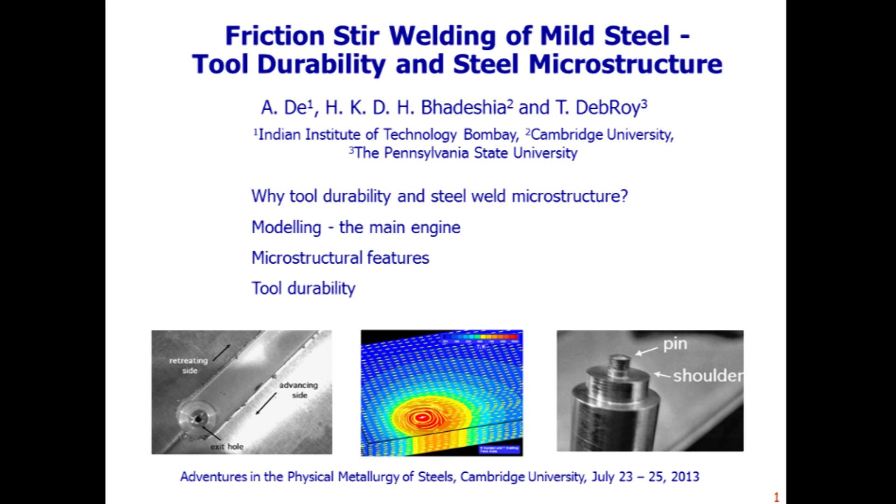Friction stir welding is not commercially used for steels. It's a very nice process for joining soft alloys like aluminum alloys. The problem is with the tools for welding hard alloys—the tools wear out or fail in extreme cases, and the cost of the tools remains high, compounded by high temperature and very rapid heating, cooling, and stresses on the tool.

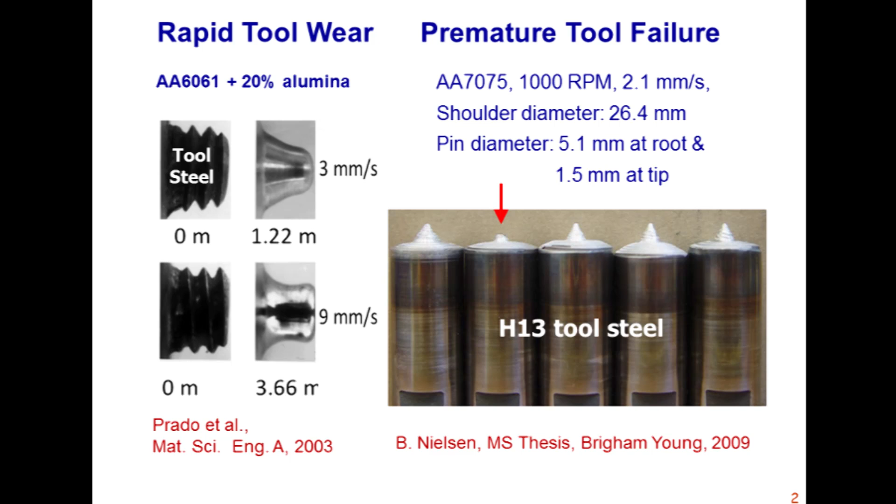Here is an example of what happens even for hard aluminum alloys like 7000 series, or if you put in some hard particles—the tools wear out very rapidly, and in extreme cases, for certain conditions, they can even fail catastrophically. So that remains the major problem.

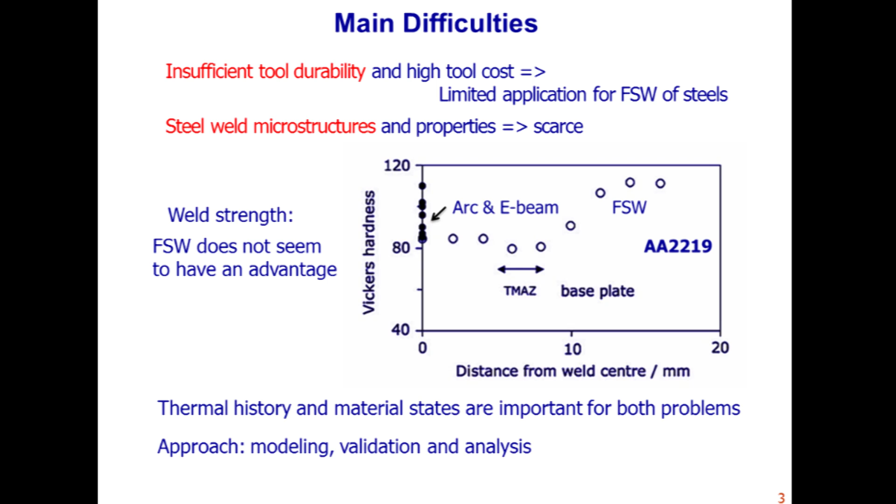For steels, the structure and properties of friction stir welded steels have not been studied adequately. Even for aluminum alloys, friction stir welding does not seem to have an advantage compared to fusion welding in terms of strength. And remember, aluminum alloys have been studied a great deal more than steels, yet even for those we cannot always get properties as good as plain vanilla fusion welding processes.

So there are two issues: insufficient tool durability and high tool cost—an issue with the tool—and an issue with the structure and properties. These are scarce; they need to be studied a great deal before we can actually commercially use friction stir welding for steels.

Thermal history, time-temperature history, and stresses are important for both problems. So the issue is, how do we get the time-temperature history, and how do we get the stresses for different welding conditions for friction stir welding of steels?

One of the ways these types of problems have been addressed in fusion welding is by numerical simulation of heat, mass, and momentum transfer during welding in the fusion zone and the heat affected zone. So here we take the same approach: we solve equations of conservation of mass, momentum, and energy.

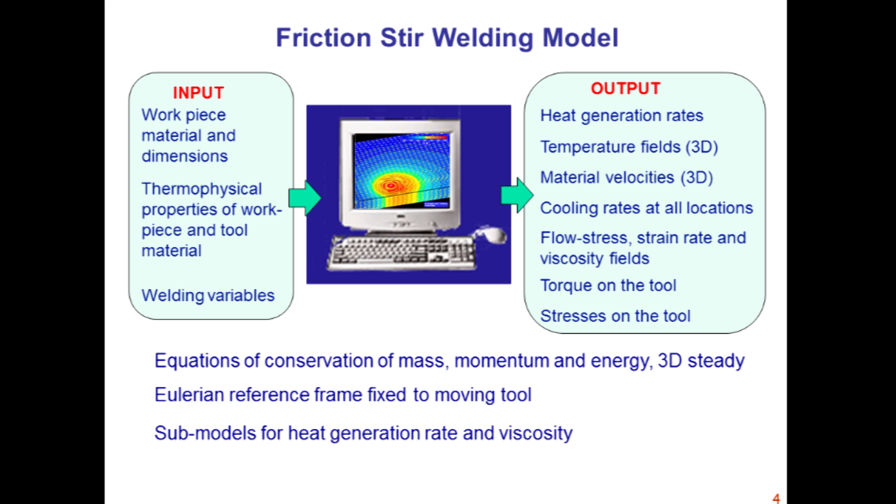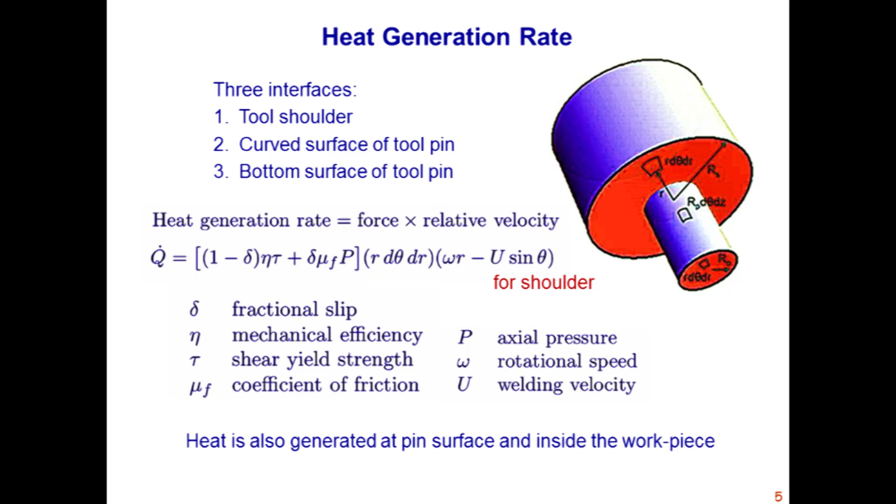To solve these equations, you also need submodels for heat generation rate and viscosity. The heat is generated primarily on the shoulder, but also on other surfaces, and to a much lesser extent in the entire volume of the friction stir welding. We have to have a submodel to estimate heat generation rates spatially at all locations within the domain.

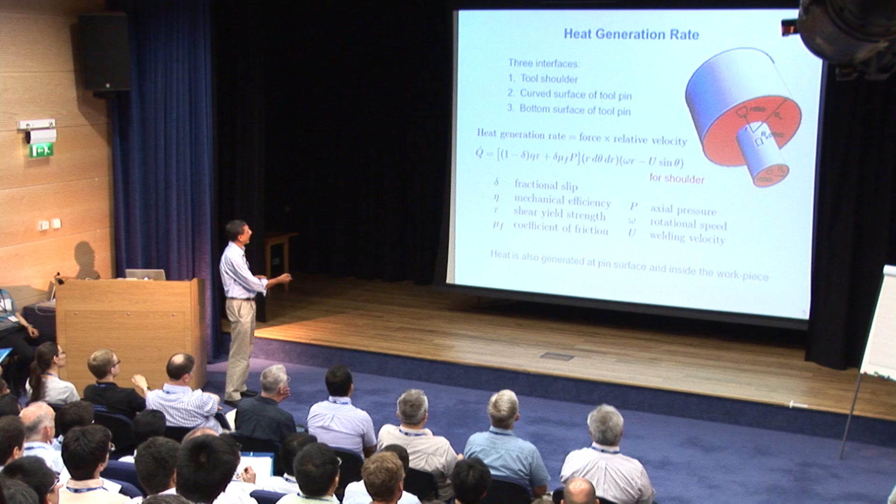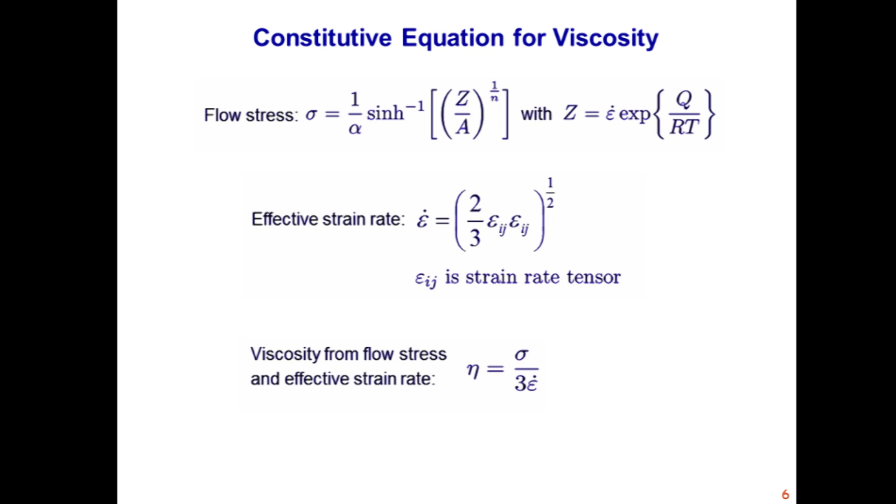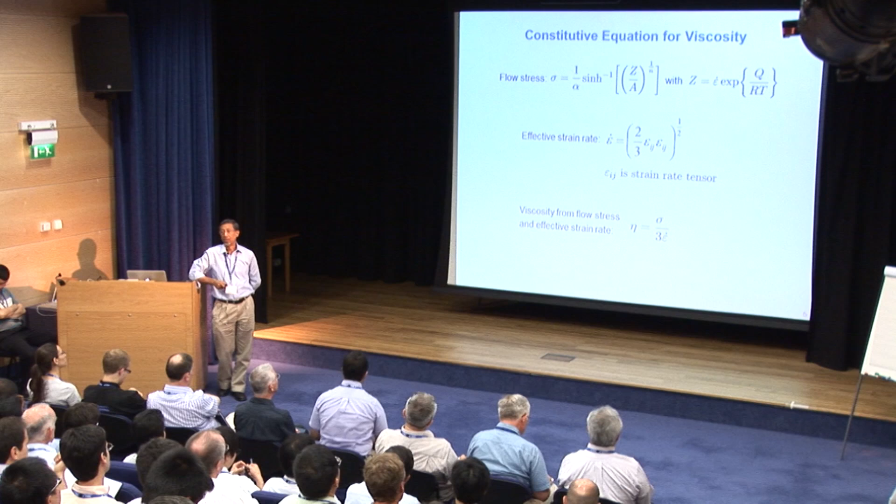In addition, we also need a model for viscosity. We get that model because we are calculating three components of velocity, from which we can calculate strain rate, and a temperature-compensated strain rate from the enthalpy equation. These parameters are material constants—Zener-Hollomon parameters, from hot working literature. Once we get these, we can calculate the viscosity, solve the Navier-Stokes equation, and get all the values.

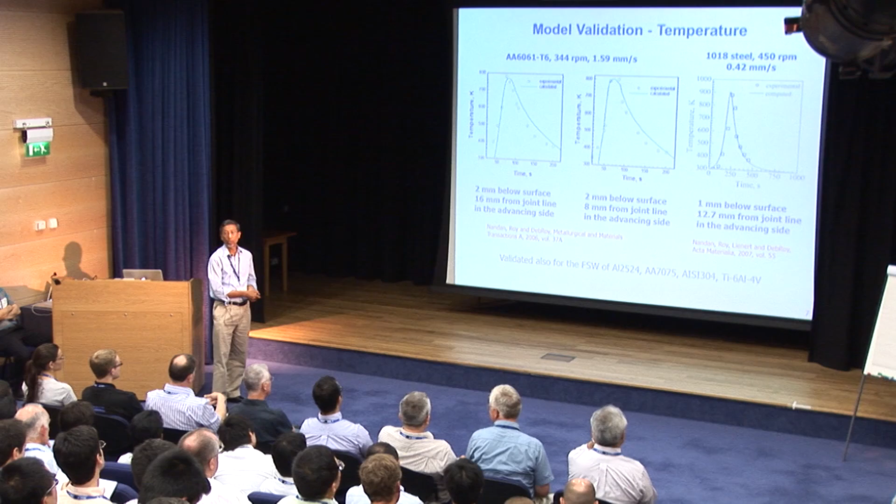Let me show you what those results look like. First is the temperature field, from which we calculate heating and cooling rates and time-temperature plots. We've done that for a wide variety of materials, from aluminum alloys to stainless steels with very low thermal conductivity, and also titanium 6 aluminum 4 vanadium alloys. The point is very different thermal and mechanical properties—both are important for these calculations.

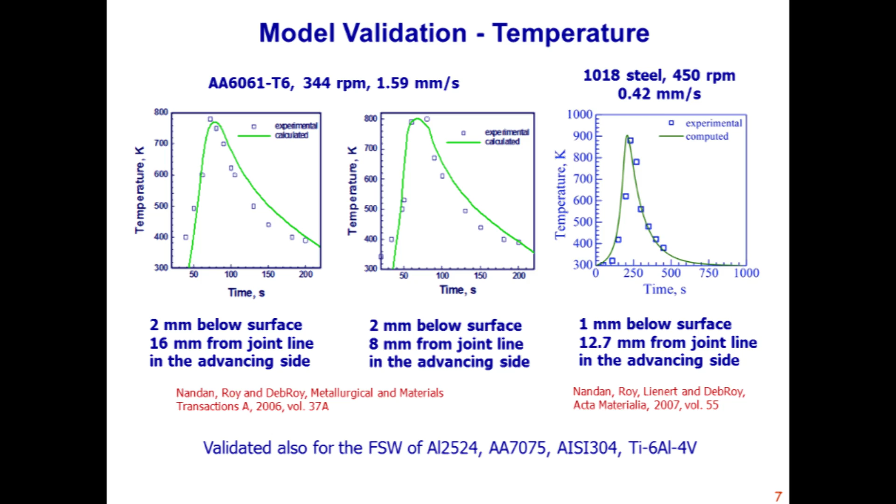In each case, we seem to be able to reproduce the thermal cycles at monitoring locations reasonably accurately. That's the issue. For temperature fields, we can measure temperatures and compare calculated values with measured values to see how good the calculations are.

Velocities are another question, because it's very difficult to measure velocities. So what do we do? We take a limiting case in which we have an analytical solution—that means if you take a rotating plate and throw in a little pin, you know from experiments what the domain looks like.

So I'm going to do an analytical calculation of what the velocity field will look like if I assume that this is simply a viscous flow in which the flow is generated by the movement of the shoulder of the top plate. And then we have got analytical solutions that you can do in the back of the envelope. Okay? Envelope has to be a little big.

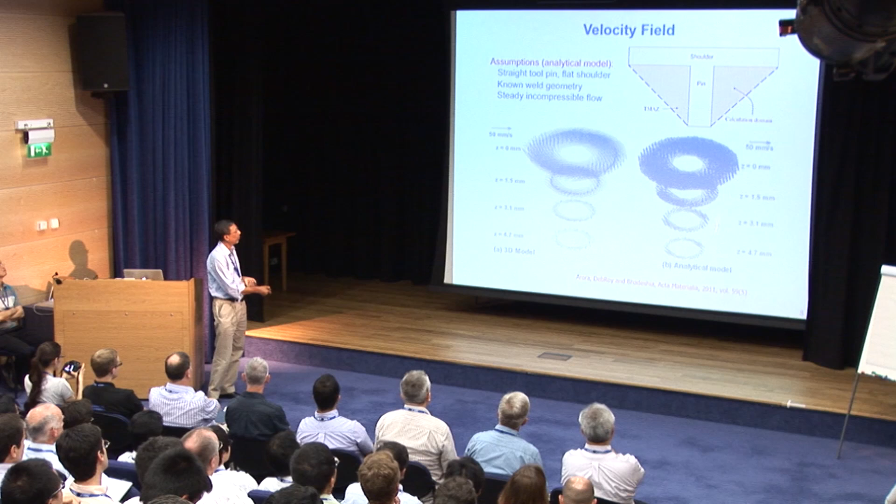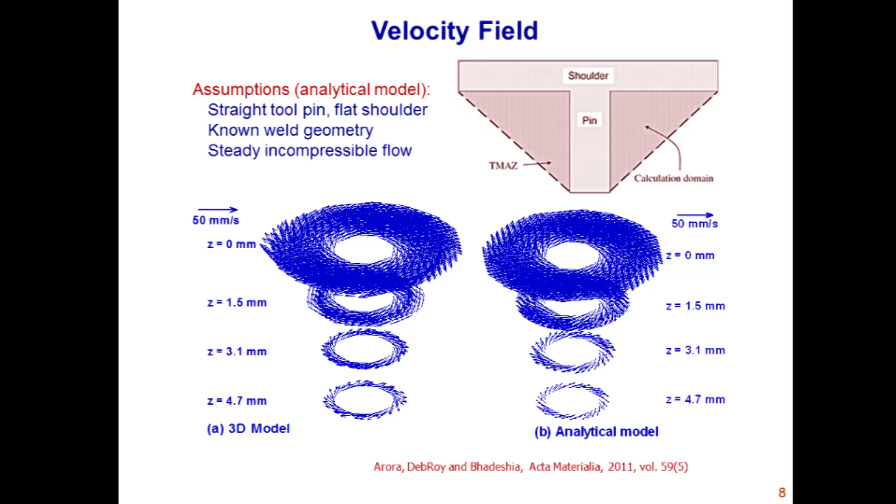And then you can compare this analytical solution with what you calculate numerically by solving more than 1 billion equations in 10 minutes. The advantage is you can actually do these calculations very easily. The calculation scheme can be put on a spreadsheet, and the spreadsheet is available at the Cambridge University website and also at the website at Penn State, my employer. They are also described in detail in this paper in Acta Materialia.

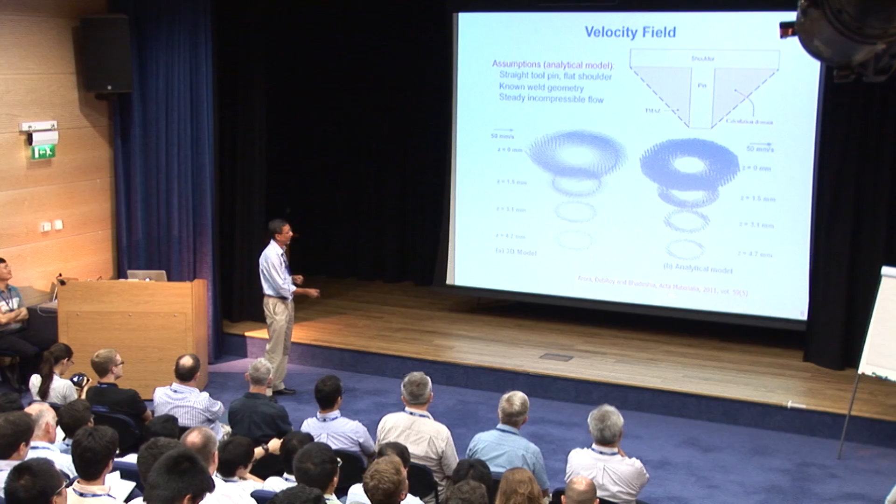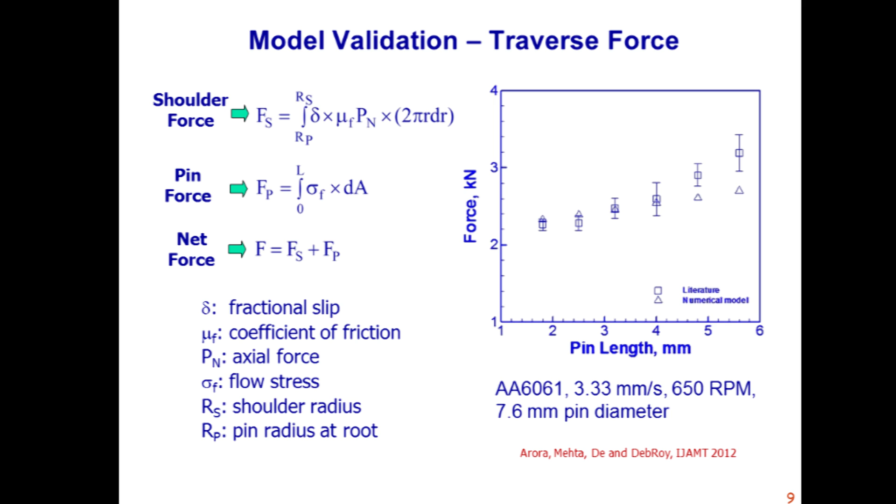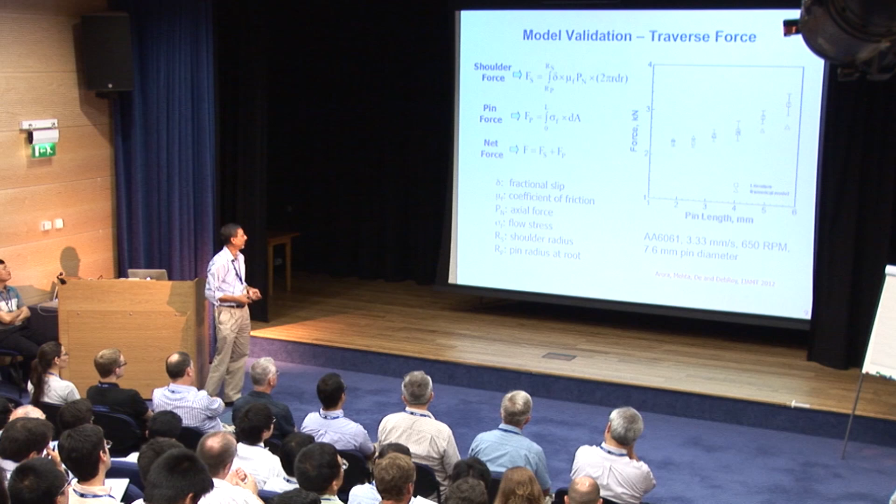Apart from velocity and temperature, we can actually measure the force on the tool as it moves around. So the traverse force can be computed, and then we can see how good those computations are by measuring it. You can measure it with a standard dynamometer, a strain gauge, or other possible techniques, and they seem to be predicting both the values and the trends reasonably well for different thicknesses of materials.

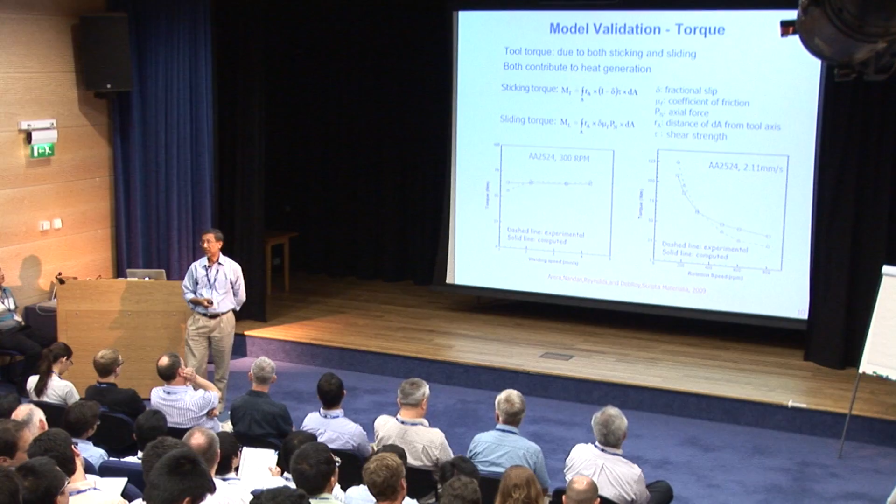So temperature, velocity fields, traverse force. The last one we want to compare is torque on the tool. This is important for a reason that will become clear in a moment, but for now we have looked at the variation of torque with welding speed and with rotational speed of the tool, and we seem to be getting a pretty good match with independent experimental results. So temperature fields, velocity fields, traverse force, and now the torque.

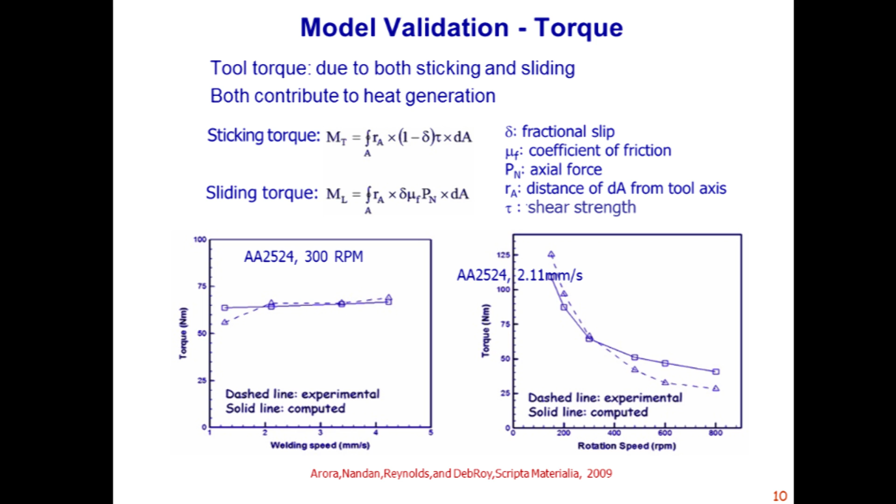So the point is, if we validate the model, then there is a better probability that the thermal cycles we will use for microstructure prediction and for prediction of maps of tool durability will be a little more accurate than if we cannot validate our model. So we have gone as far as we could go with the available results for validating our model, and then we'll be using this.

But before I go into the actual field, I want to show you one last viewgraph on what the model results can be useful for, because not everything can be measured. One of the things that cannot be measured very easily is the sticking torque. Sticking torque gives us the grip of the tool on the plasticized material, and that dictates how good the flow pattern is going to be. We show here that there is an optimum shoulder diameter for each operating condition where the tool's grip on the plasticized material is maximum.

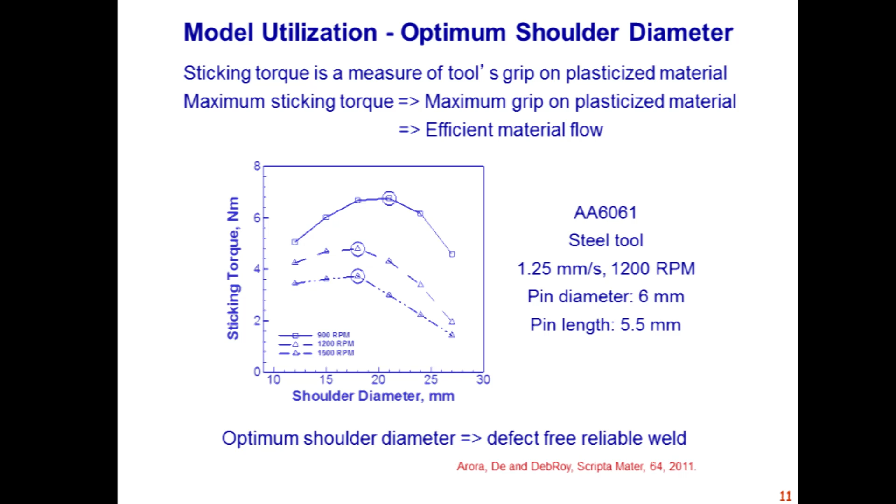It has been shown that if you go to the left or right, if you do not use an optimized tool shoulder diameter, then there is a good chance you will get a defect in the weld. So structurally sound, reliable welds can be obtained using computer models.

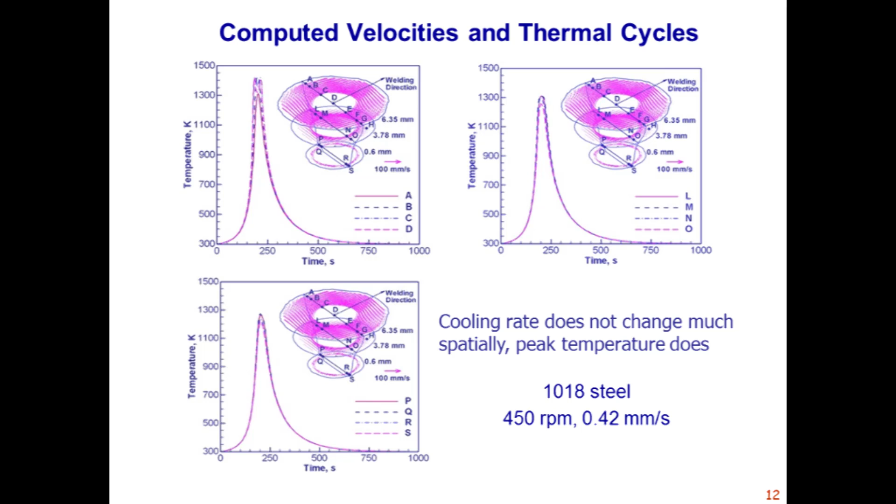Parameters are here, and we are looking at temperature cycles on the top plane, in the middle plane, and at the bottom plane. The point here is the cooling rates do not vary all that much, but the temperature at the bottom plane can be about 180 degrees lower than the temperature at the top plane.

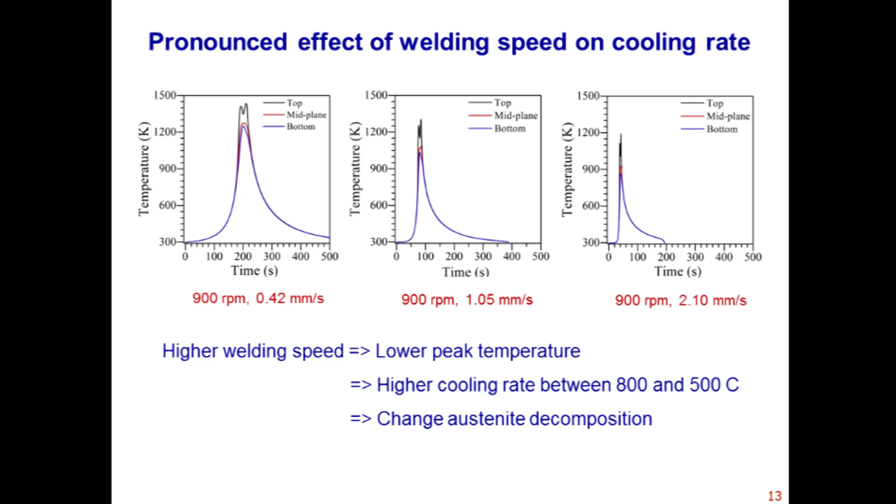So in some cases, you may not even form austenite. That's the issue. The cooling rates would not vary a great deal. They will vary, but not a great deal. Where you can vary the cooling rate is by varying the welding speed, which is like the experience in fusion welding. If you go much faster, you will cool much faster, that is expected.

But here, much faster means only about 20 to 30 degrees per second in the 800 to 500 degree range. You are not looking at laser welding where you can cool very, very rapidly. It's not that. It can be as slow as probably 5 degrees centigrade per second. That's the typical values we are looking at.

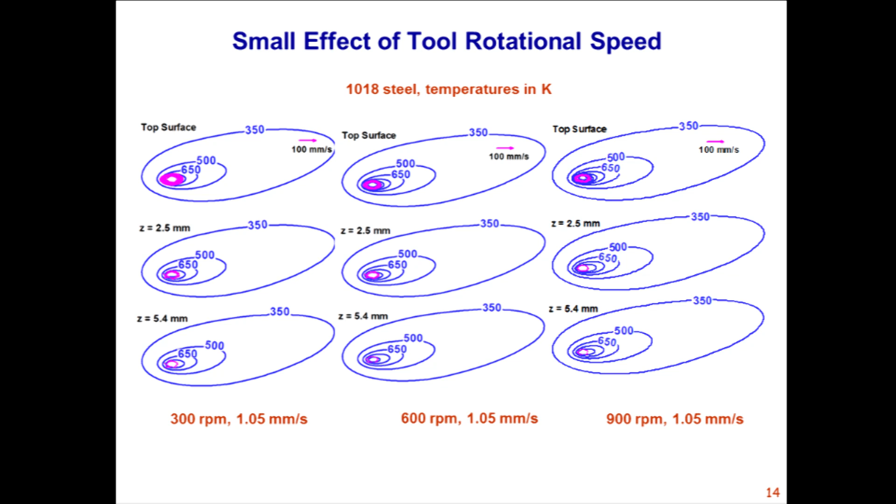In contrast, if you vary the RPM of the tool, the temperature fields do not change a great deal. They do change, but not something to write home about. So if you wanted a different structure, you actually have to vary the welding speed. That's your most potent variable.

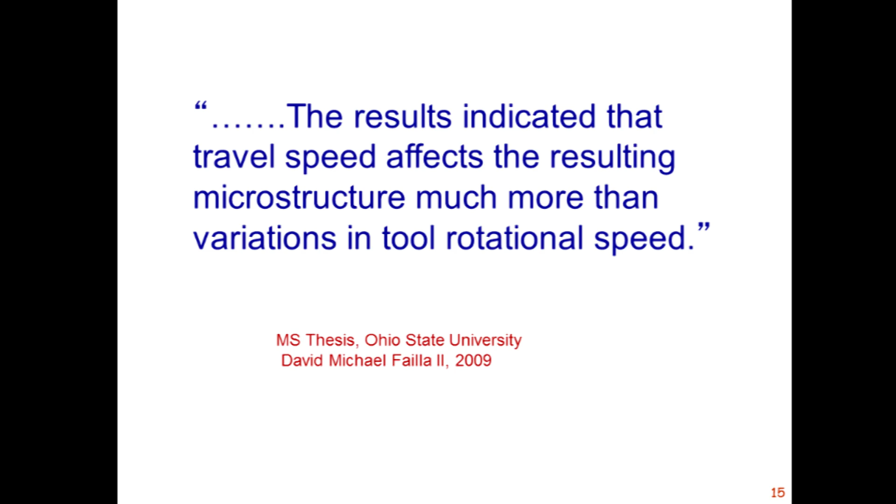And it's validated by other people's independent work. Suresh Babu is in the audience. He was on the thesis committee of the student at Ohio State, our neighbor, and they found the same story. So this is not a surprise.

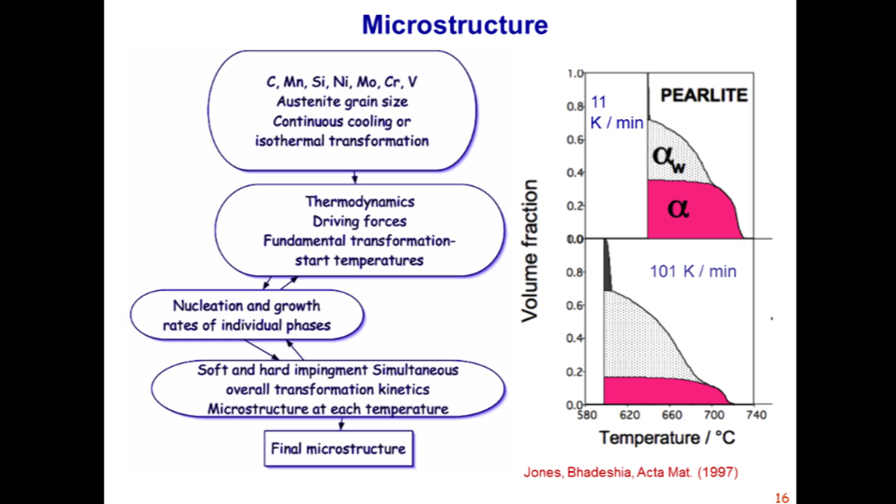Normally, to most of you, it is not a surprise that from cooling rates, composition, and austenite grain size, you predict microstructure. Many of you have been doing this for a while, so I'll tell you we tried a similar exercise where we consider the driving forces for different phase transformations and look at the transformation start temperatures from all these parameters. We consider nucleation and growth of individual phases simultaneously, then look at soft and hard impingement simultaneous and overall transformation kinetics, and we get microstructure. We did this, and what we found was the most important thing is nothing worked.

Nothing worked until we put in a stored energy of about minus 200 joules per mole, about 3.7 joules per gram for steel. And then, of course, we were able to predict the effect of cooling rate, and we expect the grain boundary ferrite, the Widmanstatten ferrite, and pearlite.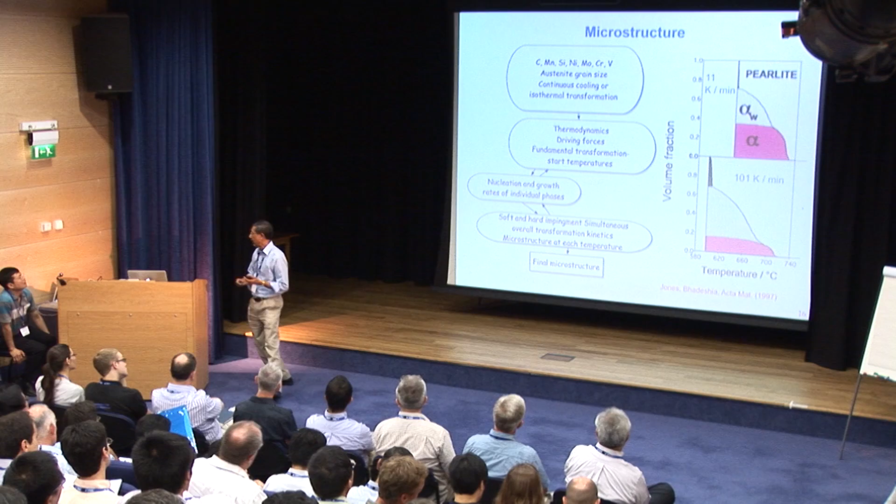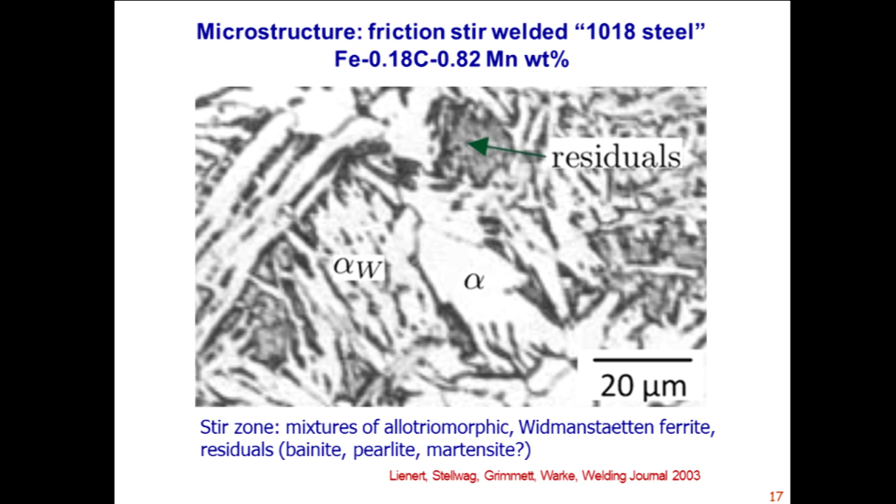And here is a microstructure that shows exactly that. This is reported in the literature in Welding Journal, and we are able to predict qualitatively these microstructures. Quantitatively, we have done some calculations, but it needs to be experimentally validated by detailed quantitative metallography. That work will be done later on.

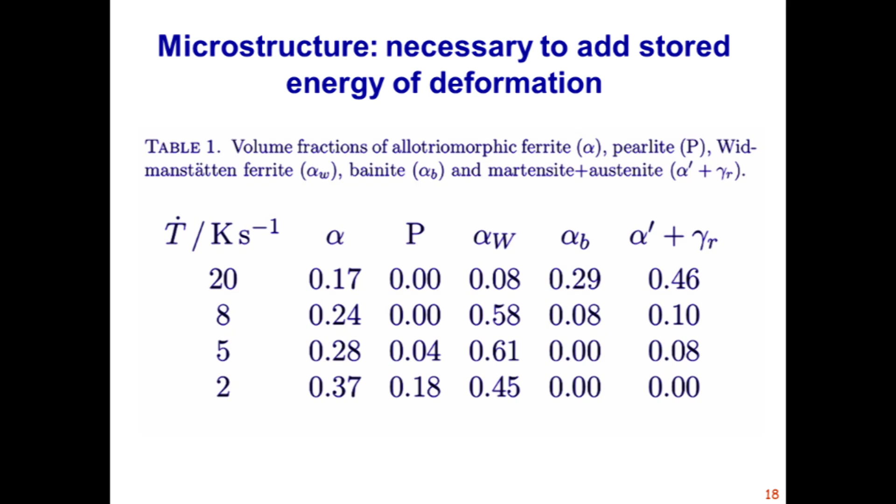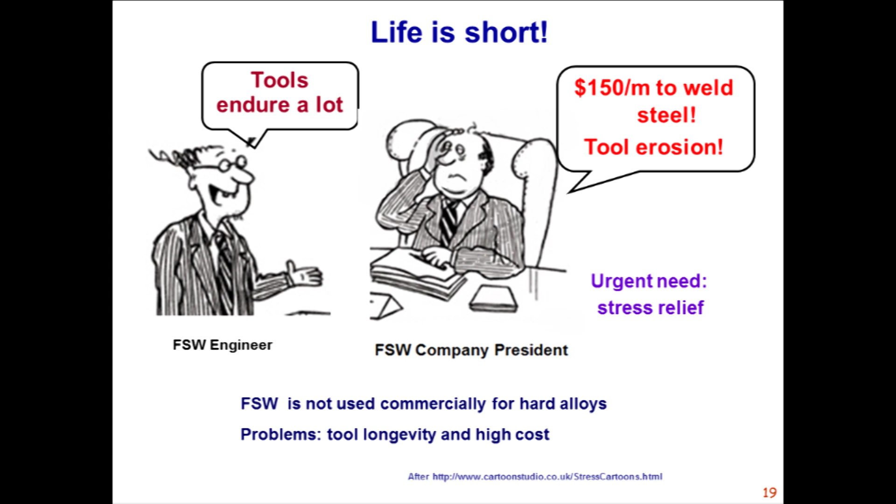Apart from the microstructure, the other thing that is very important is here our colleague is worrying about the tool life, and the value that is important here is the very high cost and the durability of the tool. The tools actually undergo a lot of stress and high temperature. So if we look at the urgent need, the actual need is if we are stuck with a tool and we must do friction stir welding, our goal is to provide guidance for the tool to last as long as it can.

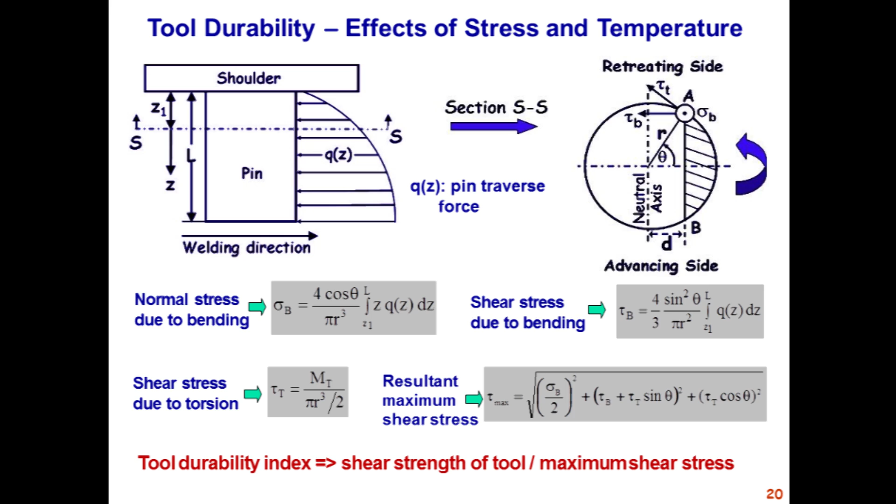And for that, we are developing maps in which we consider the normal stress, the shear stress due to bending, and also due to torsion, and we calculate the resultant maximum shear stress on the tool. And we compare this with the shear strength of the tool. So we take a ratio of the strength of the tool and what it endures in terms of the resultant shear stress. If this ratio is large, then the tool will last longer.

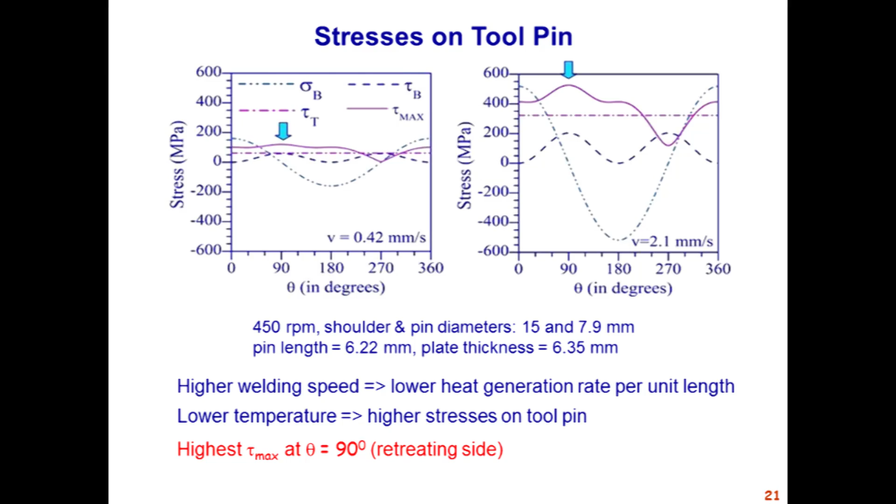If we try to weld faster and the heat input per unit length is lower, the temperature is lower, the stresses are higher. So if we vary parameters, the stresses change and the temperature changes, and therefore the tool durability changes. So if we are stuck with a problem, we must weld. Those maps will provide good guidance as a first step for the tool to last as long as it can. Allow me to show just one view graph and I will stop.

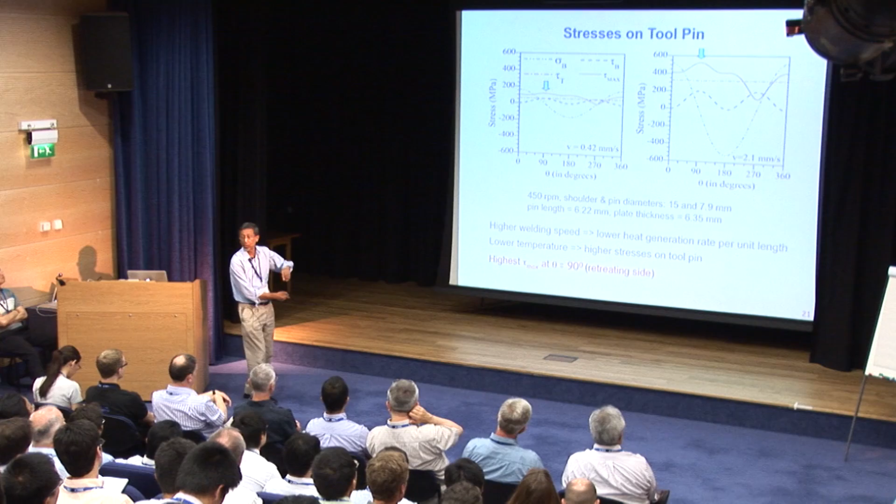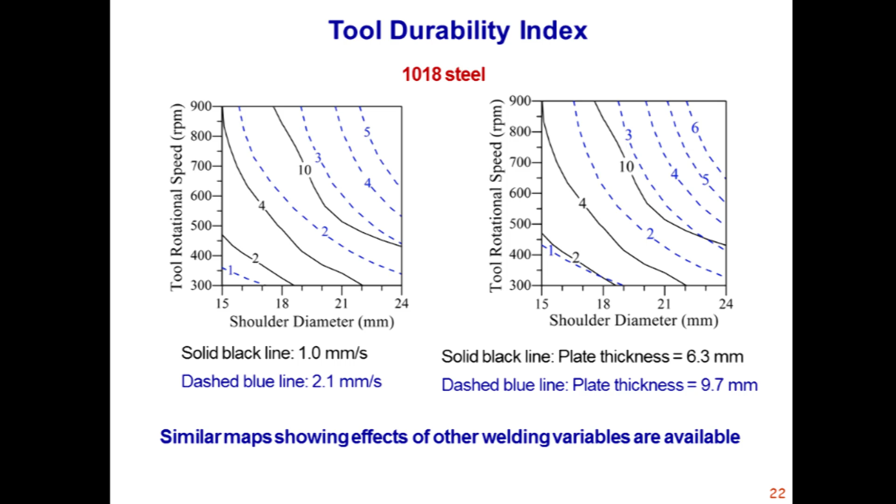Here we show a plot of shoulder diameter versus tool rotational speed, and these solid lines are the strength of the tool divided by the stress that it experiences. So a factor of 10 is good. A factor of 1 or 2 will make anybody nervous because you don't know what will happen. So here, if we go with a lower speed, the safety is higher. If you try to go very fast, there is a chance that the tool will not be very happy.

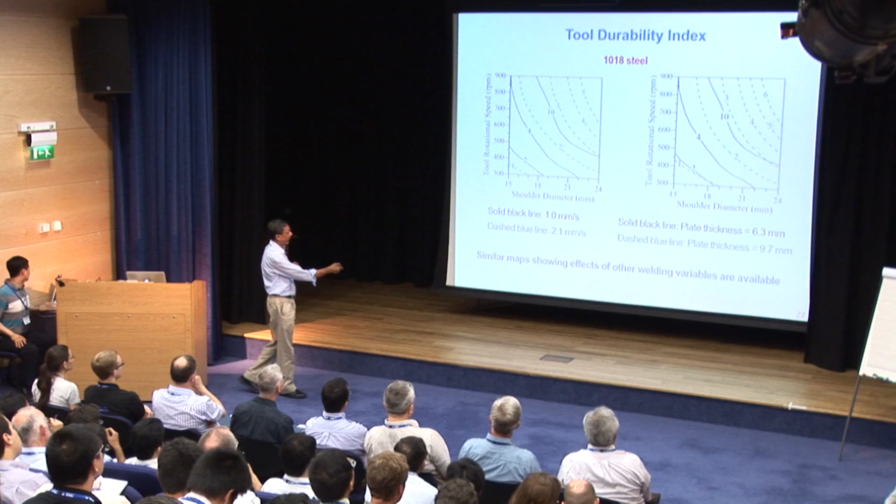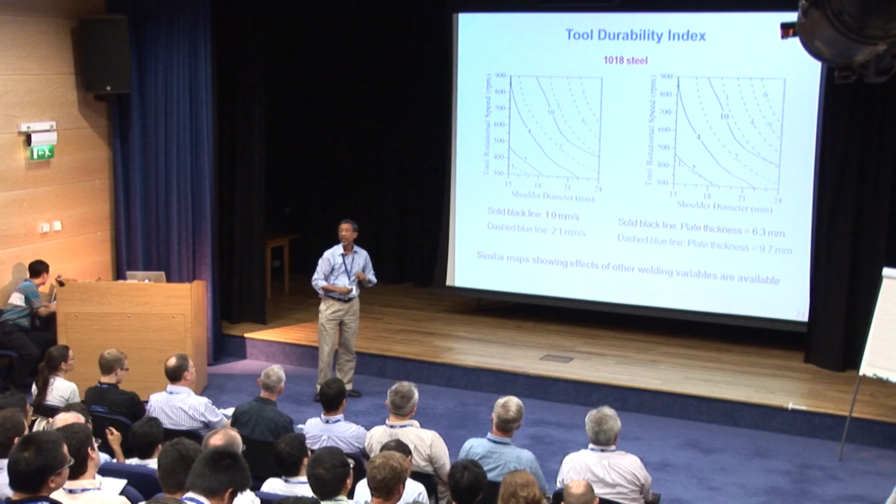And here again, if you try to weld a thicker plate, then the problem would be a little more difficult than if you weld with a thinner plate. I will stop here. Thank you very much.

Thank you very much for that talk, and thank you in particular for giving a talk on numerical analysis that was not boring, because I know that's challenging. Thank you. Thank you for that.

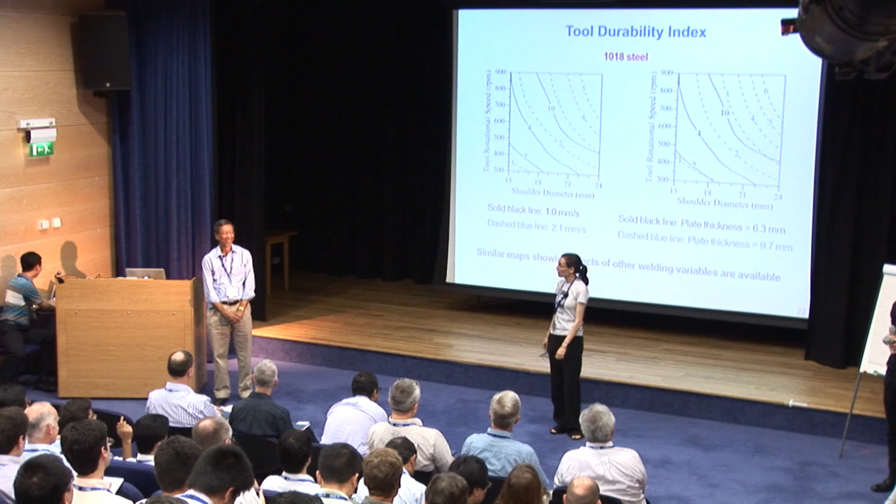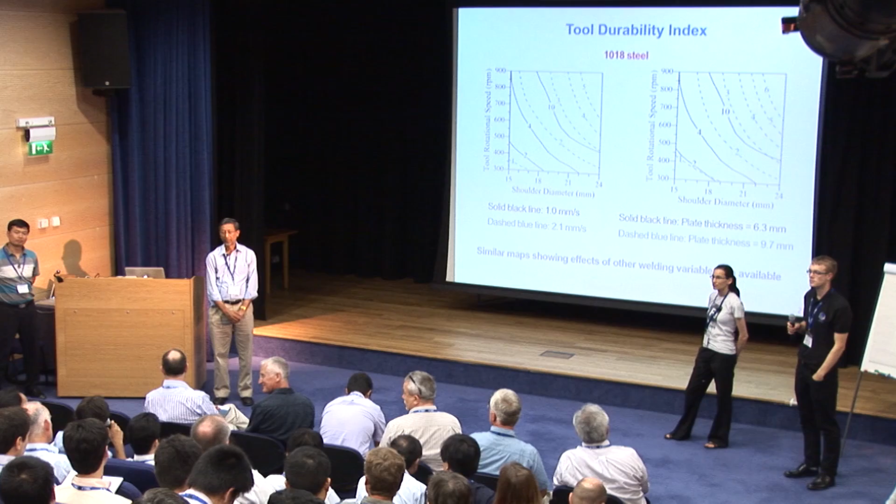Do we have any questions? That was a nice talk, but I have a question on the mechanism of friction stir welding. People say there are two types of diffusion mechanism: first is thermal diffusion, other is ballistic diffusion. So in your view, which mechanism is most important for friction stir welding?

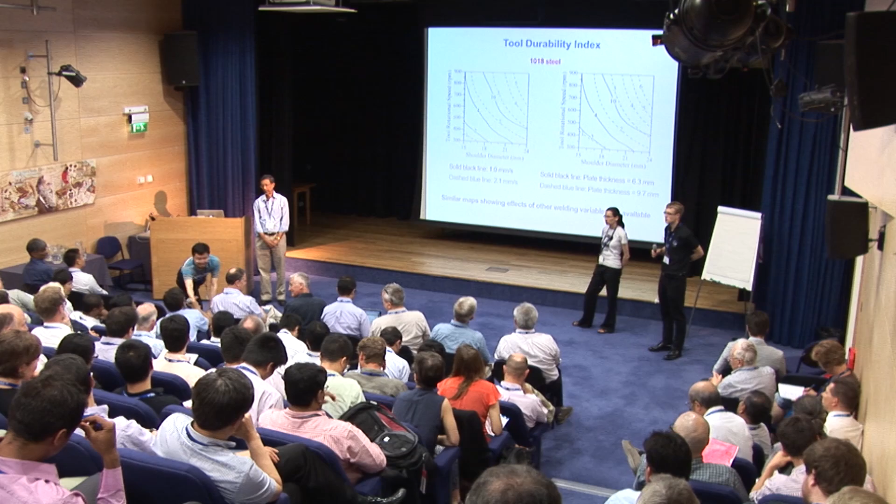The most important diffusion is thermal diffusion, because without heat, there is no welding, even for solid state welding. That I understand, but in your work you have said that the tool speed has a very strong influence on the microstructure development. So from there it came into my mind that if the tool speed is so important, then there must be some influence of ballistic diffusion in that case.

I am normally very afraid of any type of ballistics, except... no, I'm serious. On a more serious note, this is a much more ordered process than anything like the type of welding we do with—what do you call that—explosive welding. The mechanism here is gradual, and that's the reason. I was not trying to make fun of your question, believe me. Okay, thank you, it's a pretty reasonable question I think, and I don't completely know the answer to your question.

Just a background question, because I don't know much about this topic. What is that tool actually made of, and is there any possibility for improvement of performance by changing the material of the tool, or is there some constraint that you have to follow with the tool material?

The tool materials currently used are polycrystalline boron nitride, and also sometimes tungsten. And just last week, Science and Technology of Welding and Joining announced a prize for development of tool. It went to Osaka University's Professor Fujii and his team, and they developed a tool made up of iridium alloys. But you know, iridium is more expensive than gold, and that is what makes me somewhat nervous.

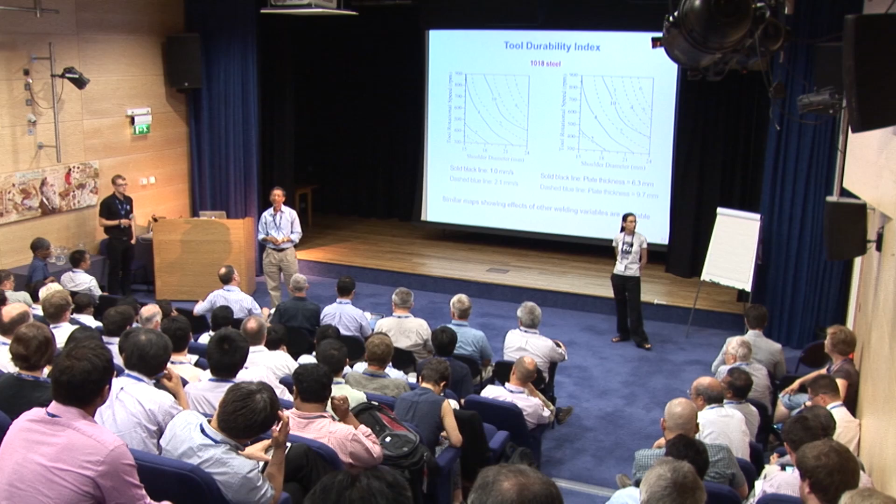I think for spot welding, if you can have a tool of composition very close to the composition of the final product, you won't leave a hole, and the automotive industry would be very, very excited about your work.

It's not my work, it's just an idea. Your idea, sorry, I misspoke.

I just want to add that it's actually a GE patent for consumable friction stir welding tools. So that's one of the problems with friction stir welding, as you all know - you stumble on other patents every other time. So it's one developed by GE on that.

So thank you, Suresh. That's a valuable comment.

I have another question on the transitions - you have to start and you have to finish. Is this something you work on, how to make the transition faster or shorter, considering that part of the product will probably not be useful?

It is more useful for the transient processes, like spot welding. Here we have focused mostly on steady-state processes, so this particular talk was not focused on that, and we have not worked on that important problem. Thank you.

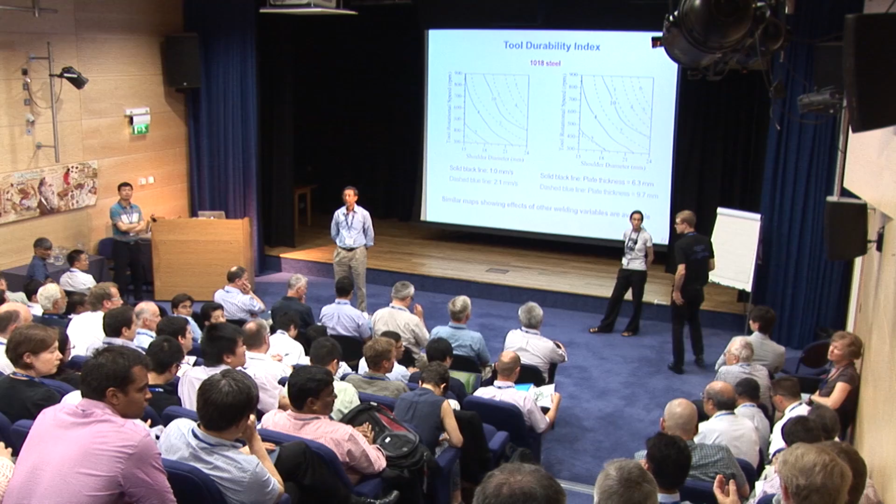The problem with the tool is because of the very high temperatures that you're using - or would that happen at any temperature? There were some Japanese experiments done some 5-6 years ago where they welded at like 700-800 degrees centigrade. Would that help to prolong the life of the tool?

The problem with the tool is both temperature and severe stresses under conditions of very high strain rate. The actual mechanism for degradation ranges from chemical degradation, in which there is reaction and disintegration of the surface of the tool getting embedded in the tool material, to erosion of the surface, and in extreme cases, breakup. So you will have a whole range of problems with the tool, depending on the specific material and welding conditions.

Okay, sorry, this is a general answer. We've got one question from the internet - I'm not sure the question is relevant, but it's a question from Rashid Bhakti: have you seen any difference in terms of life between tungsten rhenium and PCBN, polycrystalline cubic boron nitride material?